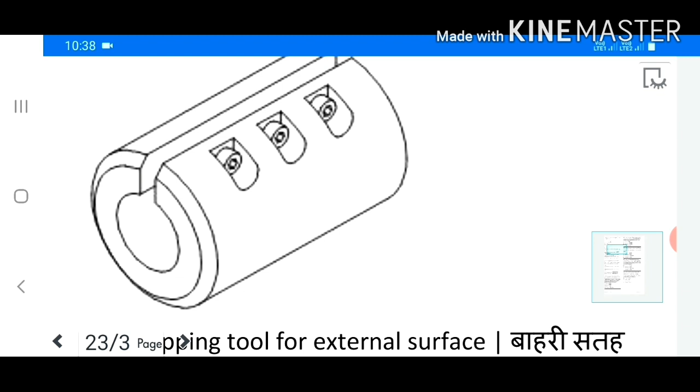Let's start. Question number 151. Which lapping vehicle is used for lapping copper and its alloys? Answer C. Soluble oil. 152. What is the purpose of lapping tool? Answer C. Lapping tool for external cylindrical surface.

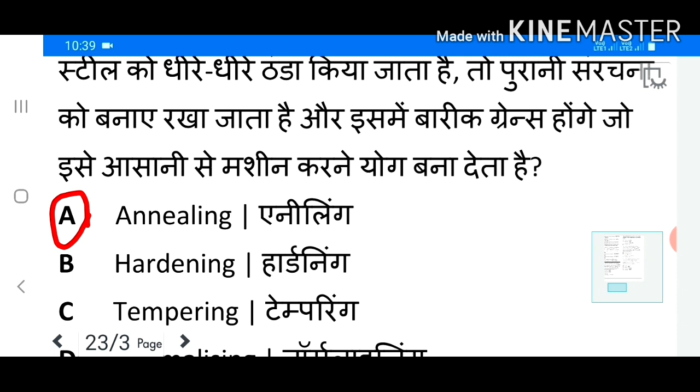153. What is the temperature that change of structure of austenite starts at 723 degree in heat treatment process? Answer A. Lower critical temperature. Hot steel is cooled slowly and old structure is retained, and it will have fine grains that makes it easily machined. Answer A. Annealing.

Question number 155. What is the name if hot steel cooled rapidly to form a new structure? Answer C. Martensite. 156. What is the process to add cutting ability and wear resistance on steel? Answer D. Hardening.

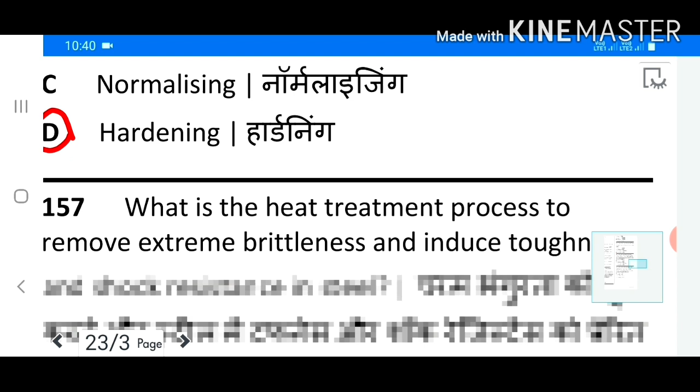157. What is the heat treatment process to remove extreme brittleness and induce toughness and shock resistance in steel? Answer A. Tempering. 158. What is the process of steel being heated to required temperature and held in the same temperature for a period of time? Answer A. Soaking.

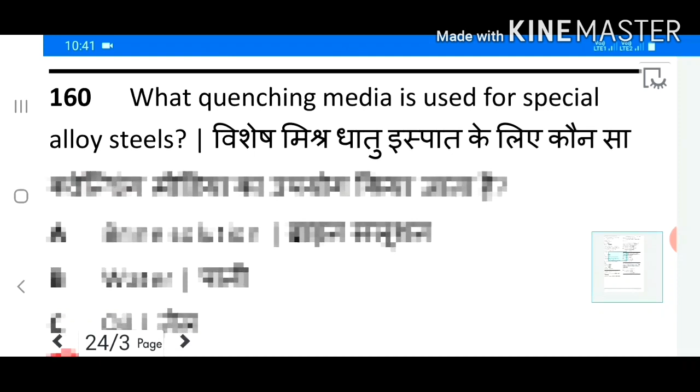159. What is the purpose of brine solution, water, oil and air used in heat treatment process? Answer B. Quenching. 160. What quenching media is used for special alloy steels? Answer D. Cold air.

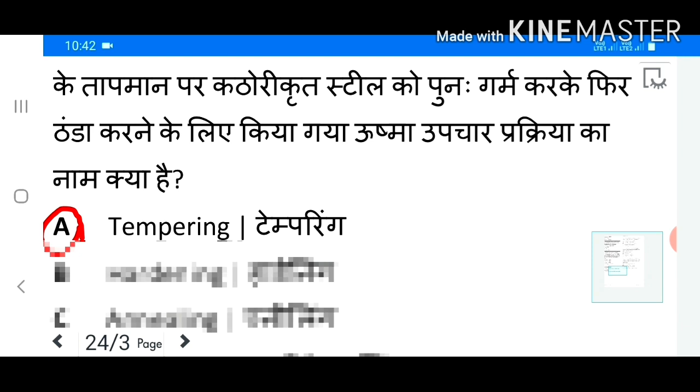161. What is the heat treatment process of reheating the hardened steel to a temperature below 400 degrees centigrade followed by cooling? Answer A. Tempering. 162. What is the advantage of annealing? Answer A. To relieve the internal stress.

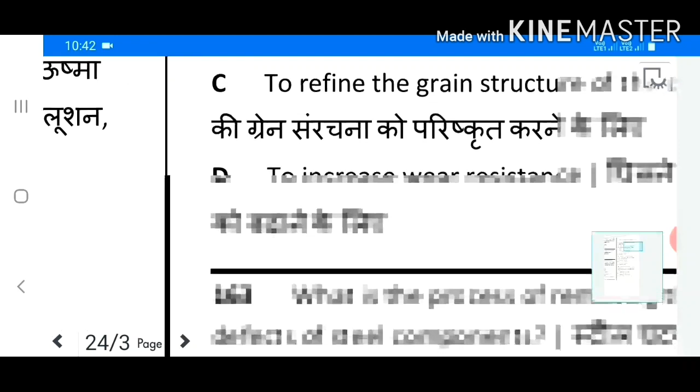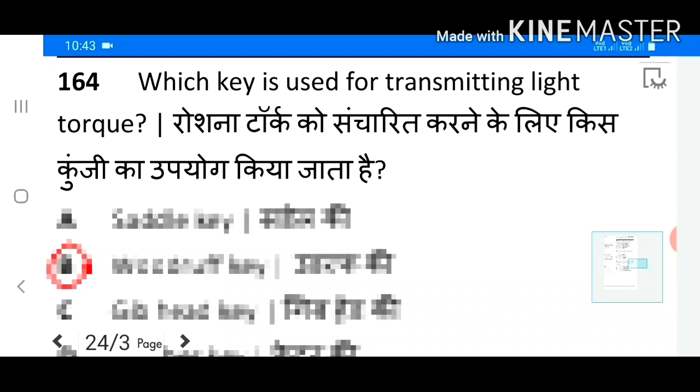163. What is the process of removing the internal defects of steel components? Answer B. Normalizing. 164. Which key is used for transmitting light torque? Answer B. Woodruff key. 165. How the mechanical properties of steel like strength, toughness, ductility are affected? Answer B. By hardening.

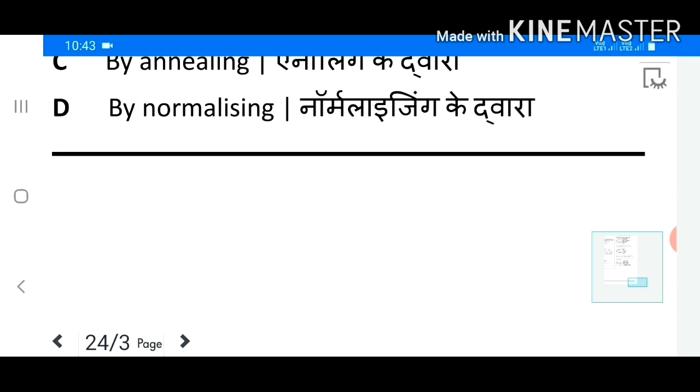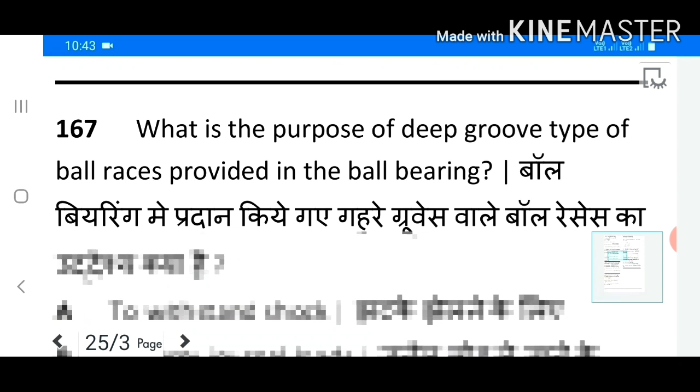166. Which bearing material has poor thermal conductivity? Answer D. Laminated phenolics. 167. What is the purpose of deep groove type of ball races provided in the ball bearing? Answer C. To withstand axial thrust. 168. Why the double roller bearing is used? Answer D. To take heavy radial load.

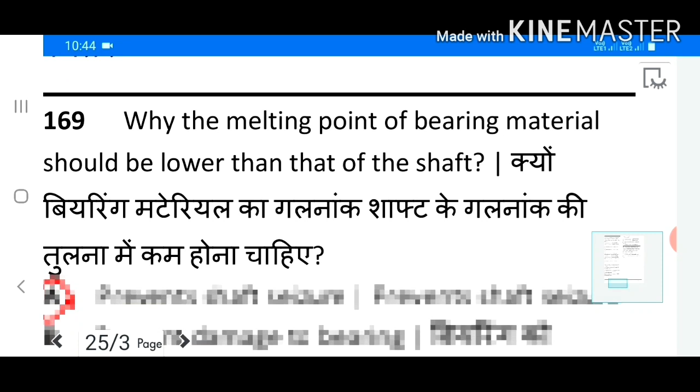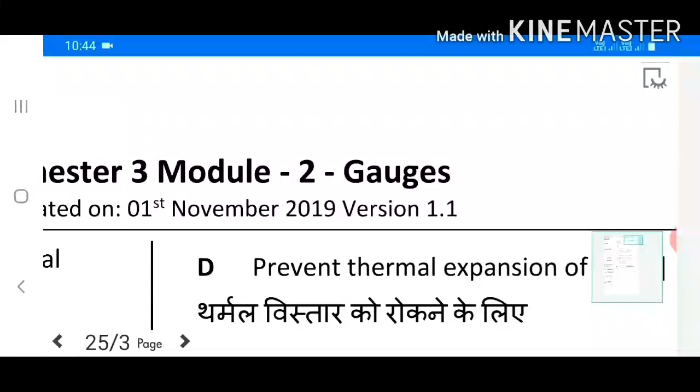169. Why the melting point of bearing material should be lower than that of the shaft? Answer A. Prevents shaft seizure. 170. What is the name of washer? Answer C. Internal and external washer. 171. Which alloying metal bearing can work at higher temperature and higher load carrying capacity? Answer D. Cadmium based alloy.

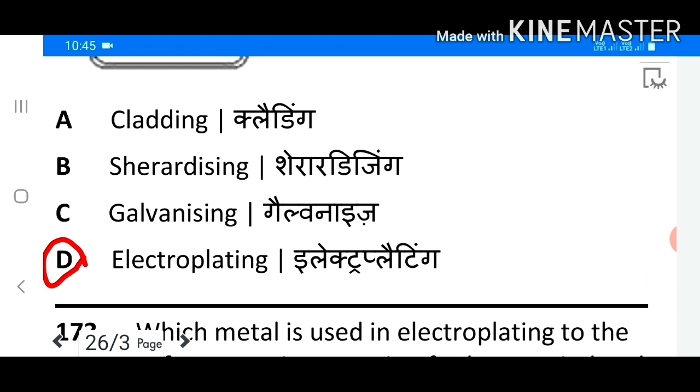172. What is the method of metal coating? Answer D. Electroplating. 173. Which metal is used in electroplating to the metal surface to resist corrosion for long period and to retain high polish? Answer C. Chromium.

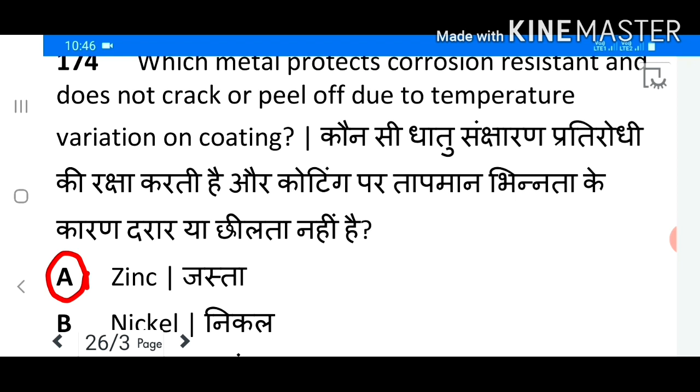174. Which metal protects corrosion resistant and does not crack or peel off due to temperature? Answer A. Zinc. 175. Which corrosion resistant metal is used in chemical plant and food processing? Answer D. Stainless steel.

176. What is the purpose of thrust ball bearing? Answer D. Vertical thrust load. 177. What is the name of bearing? Answer A. Needle bearing. 178. Which bearing material is used in connecting rod and electrical motors? Answer D. Copper lead alloy.

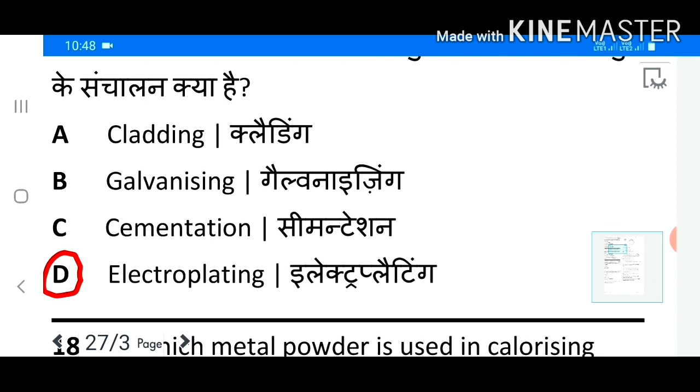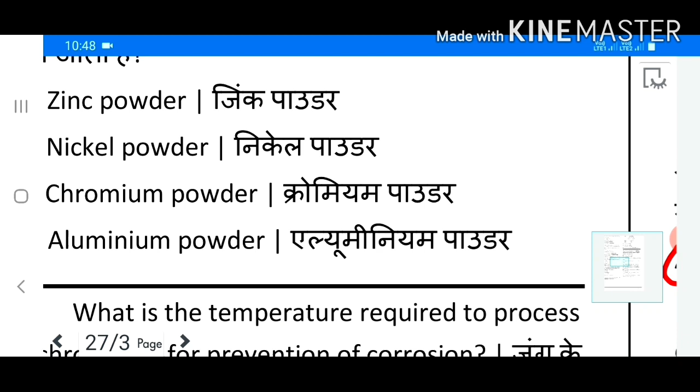179. What is the operation of a metal coated with other metal to obtain protecting surface? Answer D. Electroplating. 180. Which metal powder is used in calorizing process to prevent corrosion? Answer D. Aluminium powder.

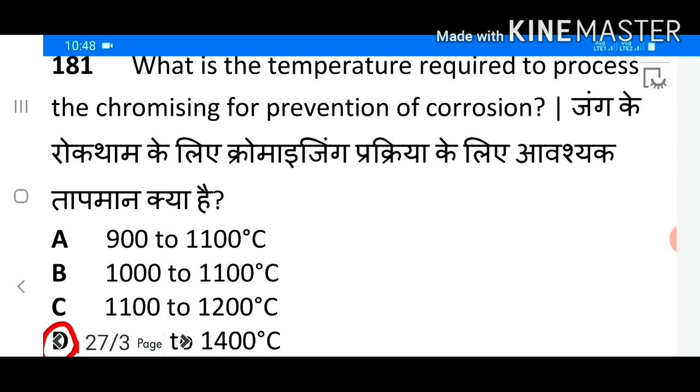181. What is the temperature required to process the chromizing for prevention of corrosion? Answer D. 1300 to 1400 degree centigrade. Friends, please revise again and again until you become thorough. Question number 182. Which metal has high resistance to chemical reaction? Answer B. Nickel.

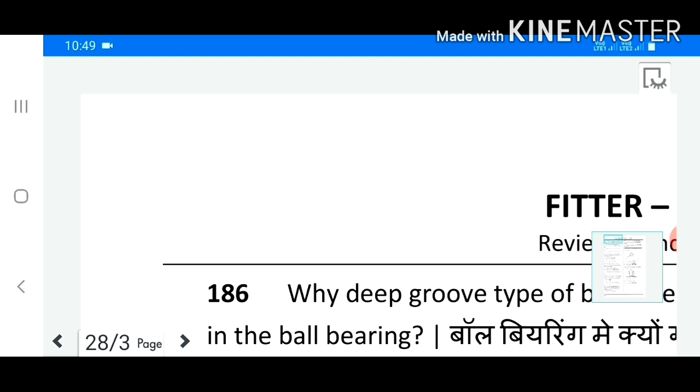183. What is the name of part marked X? Answer D. Ball separating cage. 184. Which bearing material is used for light loading and low speed application? Answer A. Cast iron. 185. What is the disadvantage of thrust ball bearing? B. Cannot take horizontal end thrust.

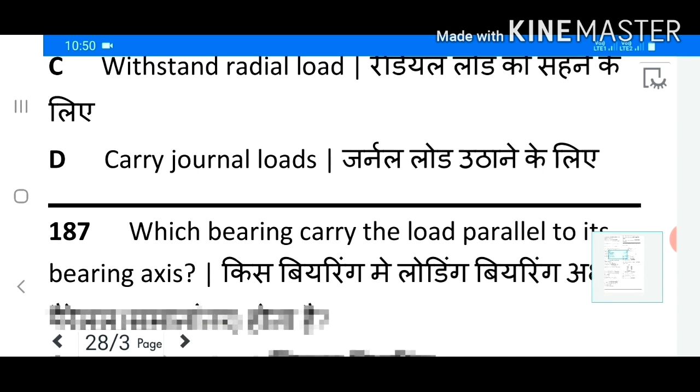186. Why deep groove type of ball races provided in the ball bearing? Answer B. Withstand axial thrust. 187. Which bearing carry the load parallel to its bearing axis? Answer C. Thrust bearing. 188. Which bearing material is best suited for hard journals? Answer B. Aluminium alloy. 189. Which bearing material has low coefficient of friction and high material cost? Answer B. Teflon.

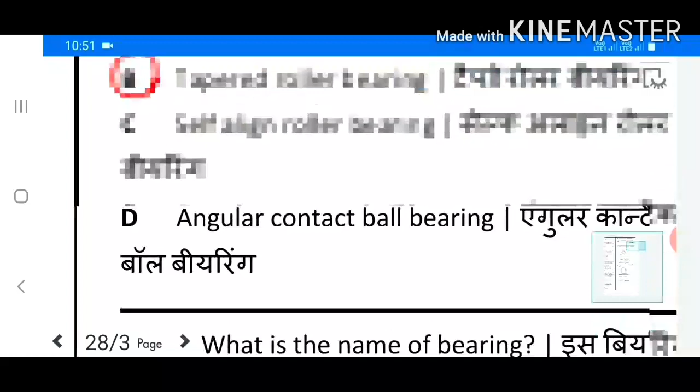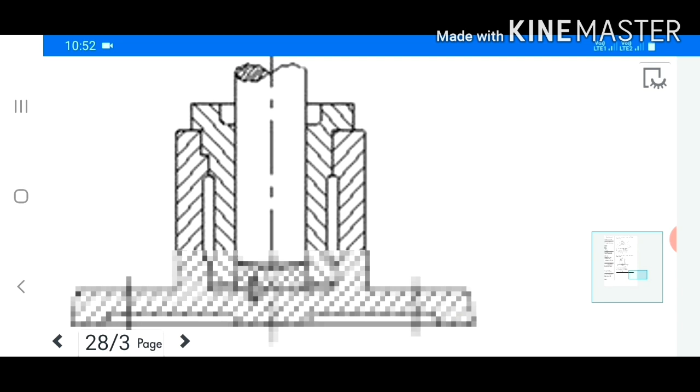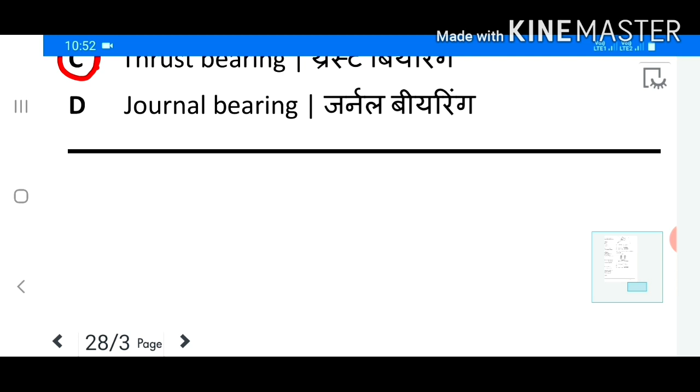190. Which type of bearing used for taking high axial thrust load? Answer B. Tapered roller bearing. 191. What is the name of bearing? Answer B. Solid bearing. 192. What is the name of bearing? Answer C. Thrust bearing. 193. What is the name of bearing? Answer A. Split bearing.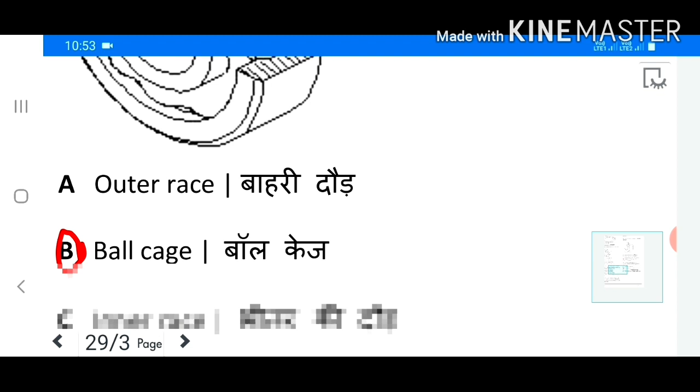194. What is the part marked as X in the bearing? Answer B. Ball cage. 195. Which type of bearing used for very heavy radial load? Answer D. Double row roller bearing. 196. Which type of bearing is designed to take axial thrust as well as radial load? Answer D. Angular contact ball bearing. 197. What is the name of instrument? Answer D. Height gauge with slip gauge holder.

199. Which type of bearing metal is self-lubricated? Answer B. Sintered alloy. 200. Which bearing is used in the limited space? Answer A. Needle bearing. Thank you for watching full video.